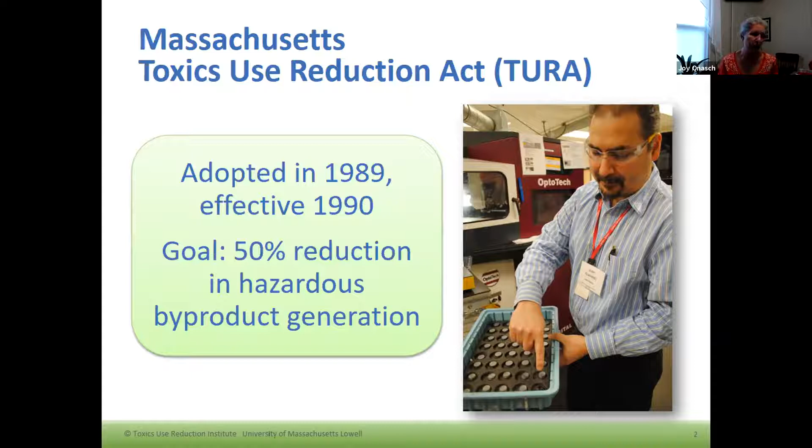We have some significant goals that have already been met with regards to helping industry reduce the use of toxic chemicals, but we continue to strive to help reduce the use of toxic chemicals in any way that we can. We like to help Massachusetts companies and communities reduce the use of toxic chemicals while also maintaining a competitive advantage. So with every project, every way that we assist people, we always make sure that it's going to help them economically as well. We don't want to push them towards an alternative that is neither going to work for them nor work for them financially. So those are very important aspects of any analysis and any projects we do with industry.

So part of the Toxics Use Reduction Act and the program is that companies must report on the amount of toxic chemicals that they use. They need to conduct toxic use reduction planning, and every 2 years assess what options are out there in good faith. And they also need to pay an annual fee, and that in turn is what supports our program to provide assistance to industry, small businesses, as well as communities.

So the core principles of toxic use reduction, I won't go through all of them, but really the whole principle is to reduce the use of toxic chemicals at the source. And that way we don't need to worry about the exposure issues, the waste generation issues, and all those other elements that come along with using the toxic chemical if we simply are able to avoid it in the first place. And there are 6 TUR techniques that we focus on.

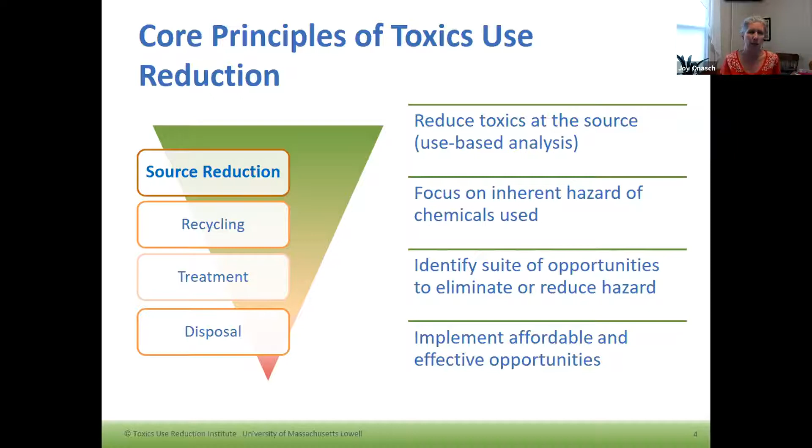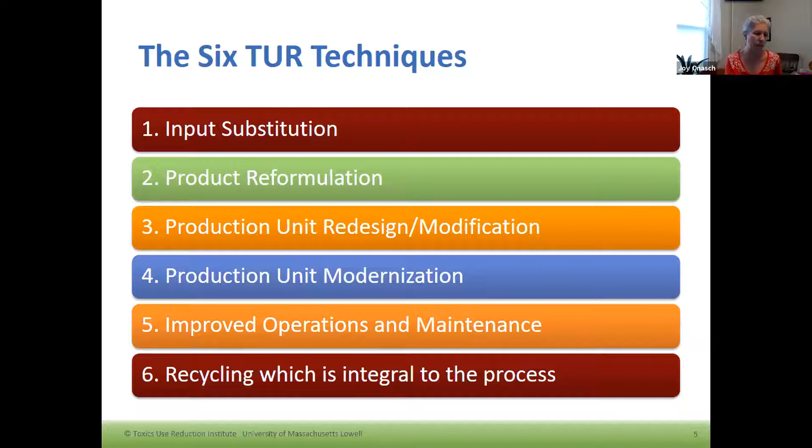Pam, who you just met, teaches the Toxic Use Reduction course, which allows people to become certified toxic use reduction planners and to learn about the 6 TUR techniques that we're focused on. And so all of our projects need to focus in on using one of these different techniques at a facility to reduce the use of toxic chemicals. We don't want to shift the hazards or the risks or the exposure somewhere else. We want to actually eliminate the issues. There are 3 different TURA entities that work on the Toxic Use Reduction Program.

MassDEP does the regulatory side of the program with regards to certifying planners, helping people with filings, taking in the filings, enforcement, and data analysis.

Then the Massachusetts Office of Technical Assistance does on-site visits when possible. Otherwise, they start doing virtual confidential technical assistance visits and reports. And then us at TURI, who focuses more on training, grants, research, preparing alternatives assessments, policy analysis, technical support, and we also have a cleaning laboratory and a library as well.

This project we're presenting on today fell underneath our industry grant program. We're very pleased that River Street Metal Finishing applied for an industry grant last year. Those eligible to apply for these grants are manufacturers in Massachusetts who have their main facility here, and are part of our TURA regulated sectors. Those sectors need to do the reporting, filing, and fee paying I mentioned earlier, and metal finishing is one of those. This particular facility doesn't because they fall under the criteria for the number of employees at their facility.

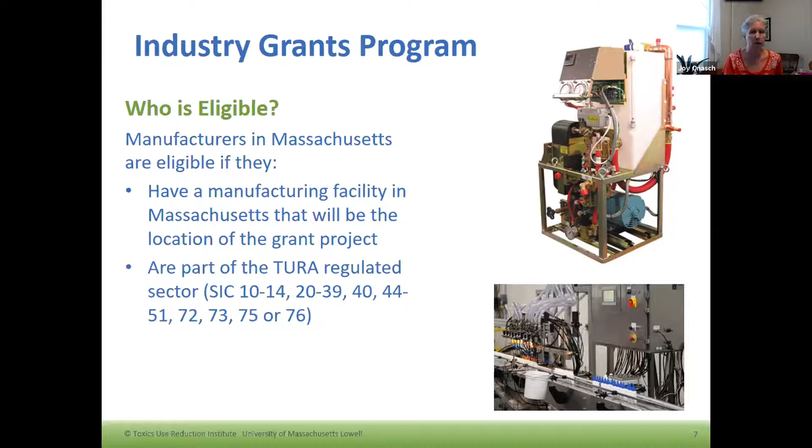Just to give you a flavor of other projects we've been working on with current industry grants this year: we've had a facility replacing an NPB vapor degreaser. NPB is considered a higher hazard substance under the Toxic Use Reduction Program and is a priority for us to work on eliminating. Another facility has replaced TCE with a safer solvent alternative and a drying piece of equipment to help finish their products.

Riverdale Mills, our first virtual demonstration event, has been reducing several chemicals by reducing drag out in their process of creating wire mesh. MSI Transducers have reduced lead through a new waffle plate design for their process. And River Street, you'll hear about more today, reducing their use of sulfuric acid. Plenus Group, who makes soup in Lowell, has done on-site testing of alternatives to sodium hydroxide used for cleaning their kettles.

So there's a wide variety of types of facilities we work with, types of chemicals we're addressing, and different solutions we're helping them work towards.

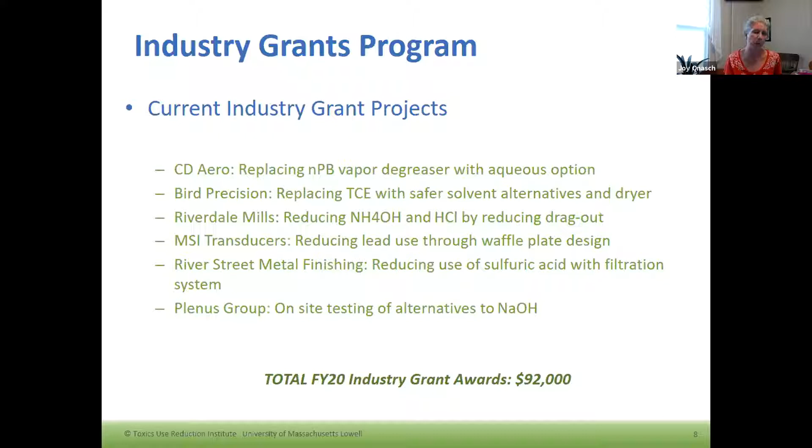Pamela Reeves, with her husband Brian, began River Street Metal Finishing in 1991. She handles all financial duties and implementation of the quality management system at the facility. Lee Reeves has been employed at River Street Metal Finishing since 2007. In addition to production work, he performs many duties behind the scenes, including customer quotes, IT maintenance, and also serves as the in-house chemist performing tank titration. So with that, I will turn it over to you folks.

Hello everybody, and welcome to our presentation. Thanks to a grant from TURI, we've been able to purchase and install an acid purification system that's greatly reduced our use of sulfuric acid. This presentation is designed to give an overview of what we do here and to walk you through how the installation of the purification system has benefited us.

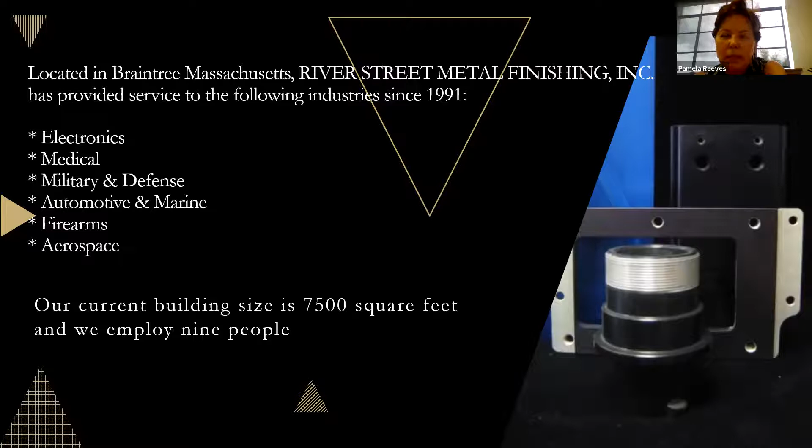We are a metal finishing company located in Braintree, Mass. We've been in business since 1991, and we service many industries, most located in the New England area. We currently employ 9 people. Our building size is approximately 7,500 square feet, and we are in the process of planning an addition that will allow us to add an additional process line and give us some much needed production space and additional shipping and receiving space.

In 2012, we became NADCAP accredited, which allows us to perform work for the aerospace and defense industry. NADCAP is an advanced quality management system that monitors and documents all aspects of our business that affect quality in any way. During the last 2 audits, we've achieved merit status. Our NADCAP accreditation took us years of preparation, and we truly consider it our greatest achievement.

Anodizing is our most popular finish that we deal with here. Anodizing is accomplished by immersing aluminum into sulfuric acid and passing an electric current through it.

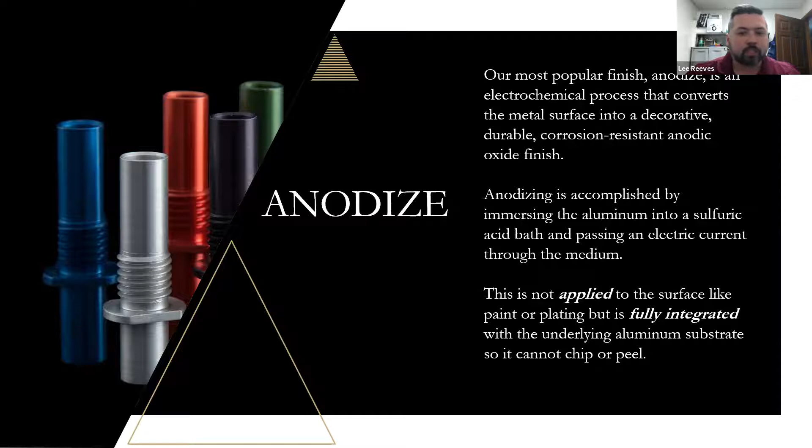So the coating becomes part of the part instead of like a surface coating, like a paint.

Our facility isn't a big facility, but you start with a simple racking of parts like this once they come into the shop.

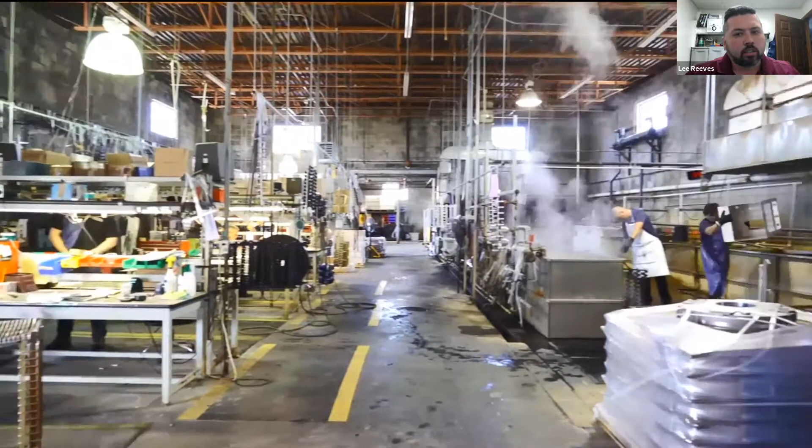Then there are pre-clean tanks, which would be everything on the right here with the hood—soap, etch, everything you need to get the part ready for anodize.

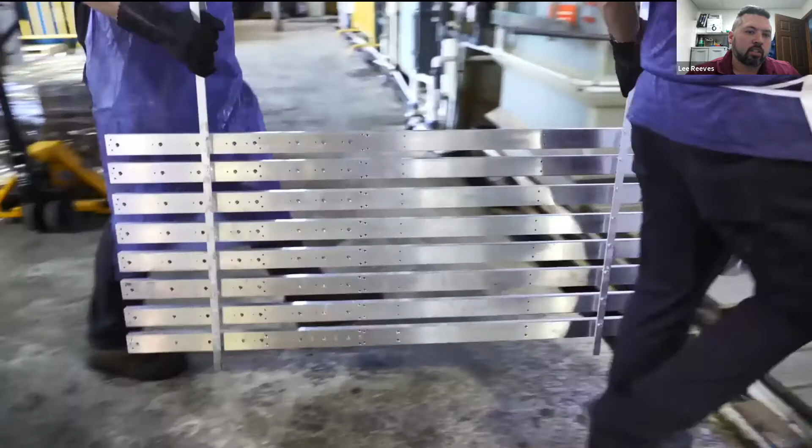Then you move into the actual anodized tanks themselves. This is a type 3 tank, which is a hard coat anodized.

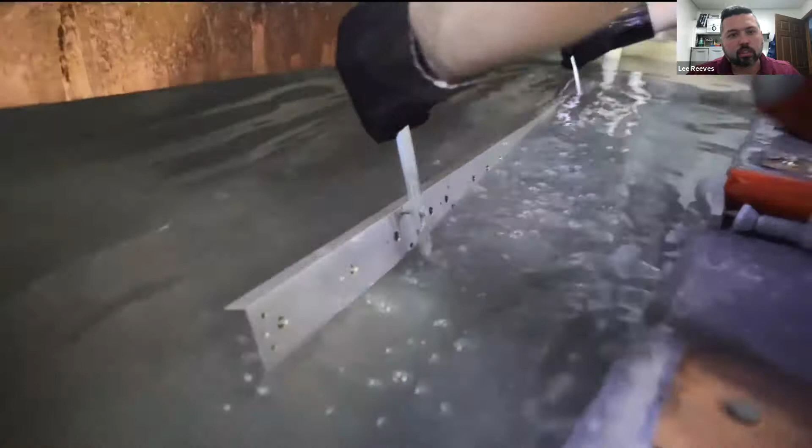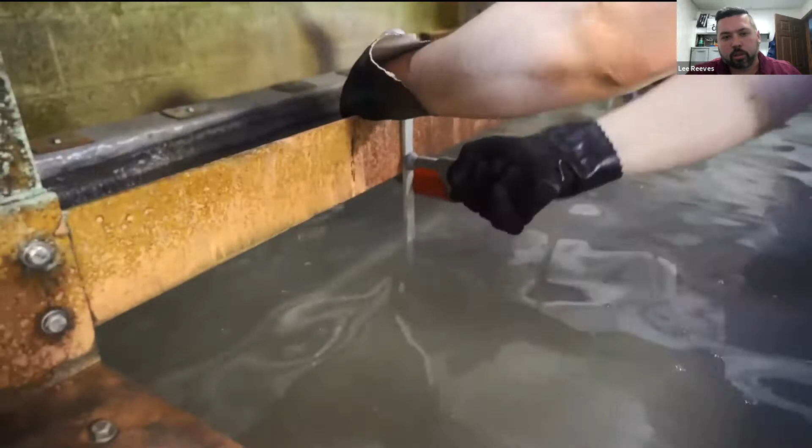Tell us what they're doing. So this is just the way that it's immersed in the sulfuric acid bath and set up to process.

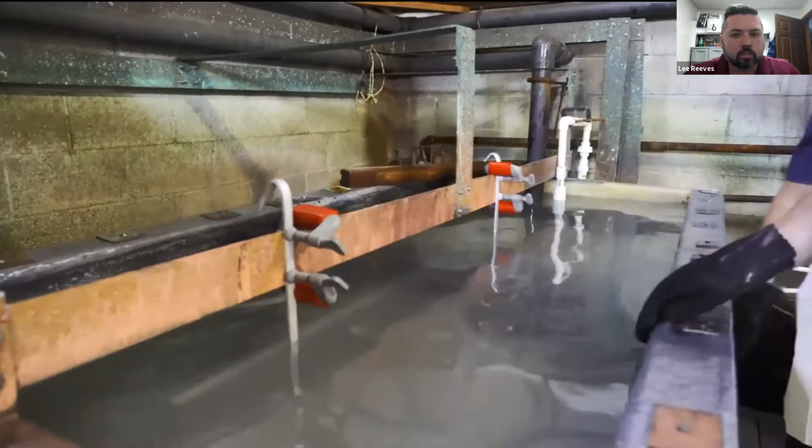And what are they doing there, Lee? So that bar is a copper bus bar, and that is the current that is passed through the part in order to achieve the finish.

Then down here are the post-processing tanks. This would be like your dye tanks and your seal tanks. The seal is the final tank that basically closes the pores of the part, so it's ready to go after that.

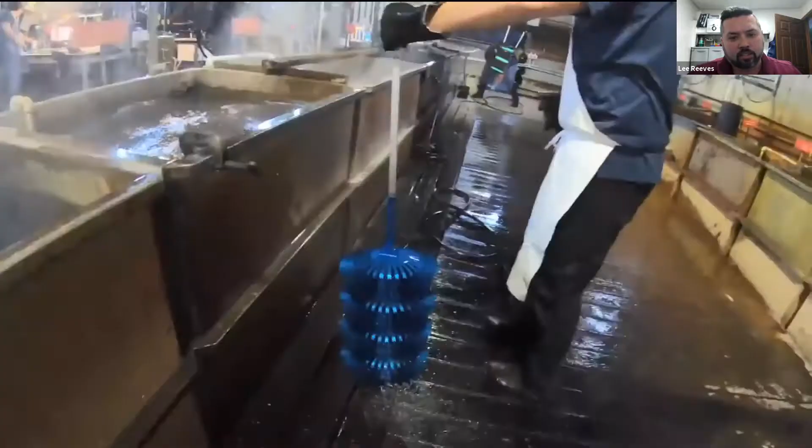So this is those same parts that you saw on the rack. This is them blue now—it hit the blue dye and hit the seal tank to finalize it, and that's our final product.

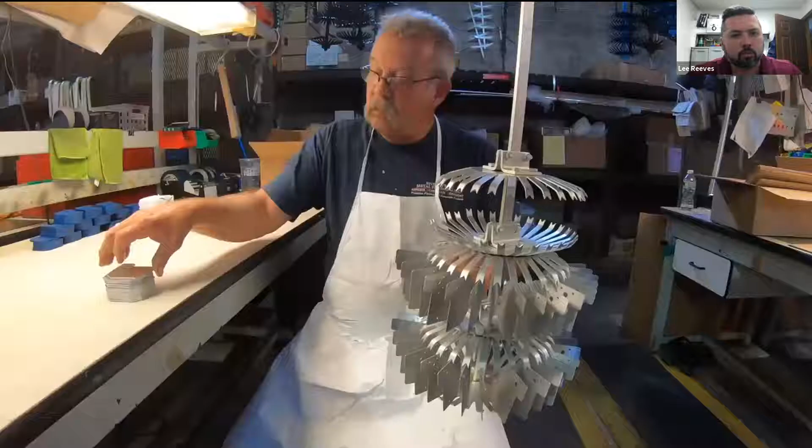To do all that, we use quite a good deal of sulfuric acid. We have 3 main anodized tanks: a type 2 anodized tank, which is 900 gallons; a type 3 anodized tank, which is 900 gallons; and we just added a second type 3 anodized tank, which is 800 gallons.

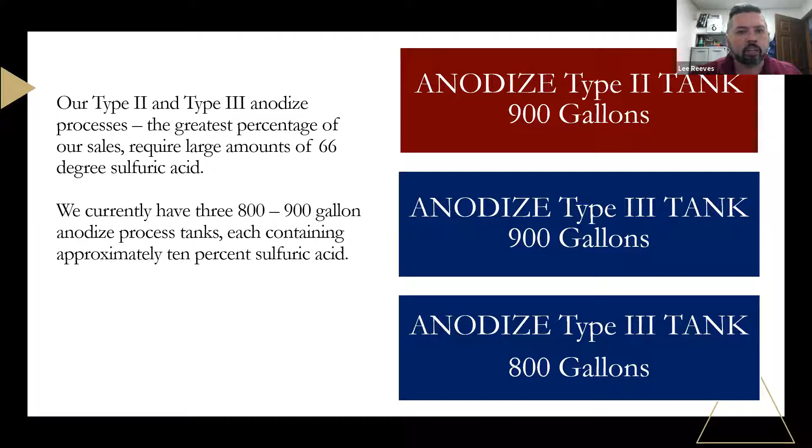To keep 3 tanks running, we use a good amount of 66 degree sulfuric acid. The tanks are monitored for concentration of sulfuric acid, but also for dissolved aluminum. We try to keep dissolved aluminum in our tanks in a range from 5 to 20 grams per liter, and it goes up faster the more parts you run through the tank.

The type 2 tank seems to climb higher than the type 3 to begin with anyway. We test for this by titrating a solution from the tank against sodium hydroxide, to find out the strength of the tank first, and then how much dissolved aluminum is actually in the tank at any time.

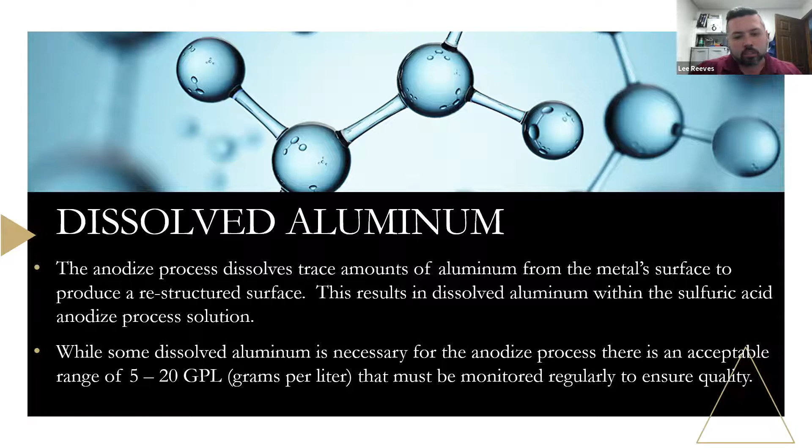Once we get to our upper limits of dissolved aluminum, in the past we would bail out 1/3 of the tank, which would be about 300 gallons. We'd pump it down, then make it up new to take the dissolved aluminum number from around 18 or 19 down to around 12 or 13.

We'd have to do that 2 or 3 times a year, depending on how busy we were and how many things were going through the tank. And each time we pumped down the tank, we'd have to use about 50 gallons per tank to make up a fresh solution and replenish what was lost.

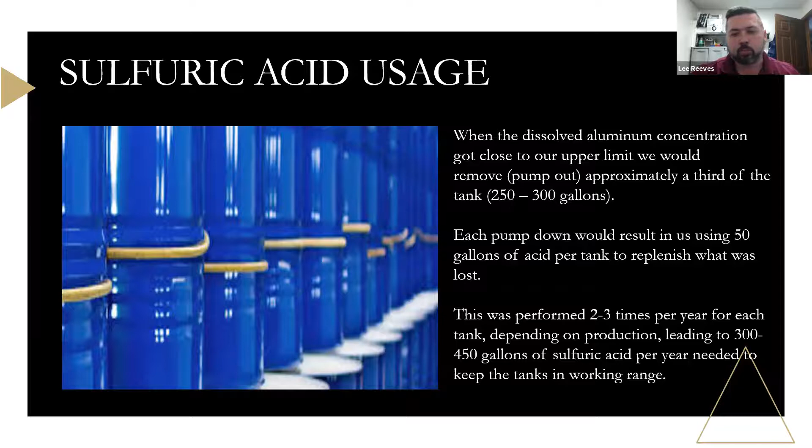For a while I'd been interested in a sulfuric acid purification system that filters the sulfuric acid, but it was never really achievable because it's an expensive system. We got in contact with TURI, and through working with them, we found out that would be the best way to reduce our usage of sulfuric acid—instead of disposing of sulfuric acid solution, we could just filter it and send it back to the tank.

We began researching systems, and we had one from a company in Canada, but while working with TURI we researched all our different options and found a local vendor, Mech-Chem, located in Mass. We met with them and went over what would work best for our system, and they gave us a quote on a system, and we moved forward from there.

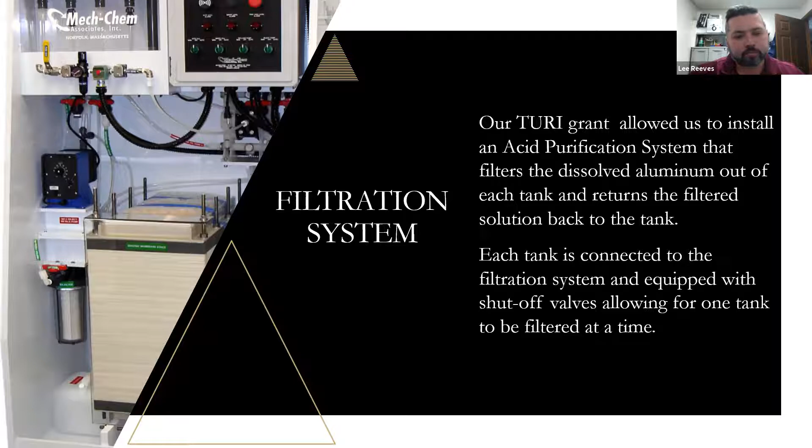This is actually a picture of the inside working of the filtration system, and it's piped in through. So we have a video.

So each tank has a to and a from, and each tank has on and off valves. As each tank gets high, we filter one at a time. So those are off right now, and if we wanted to filter that tank, we would turn that on.

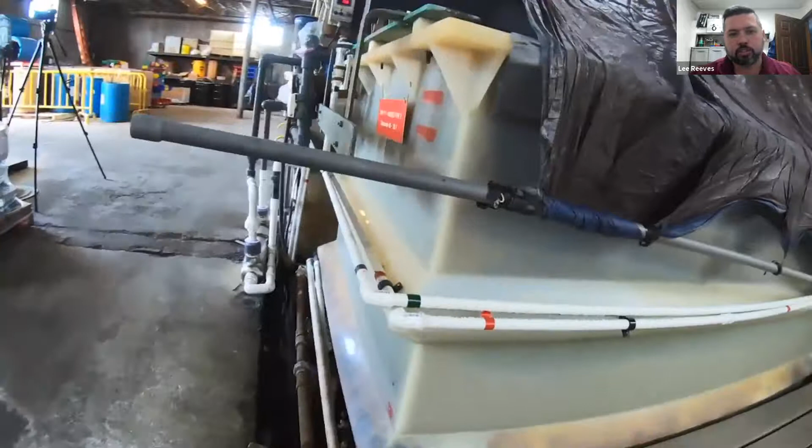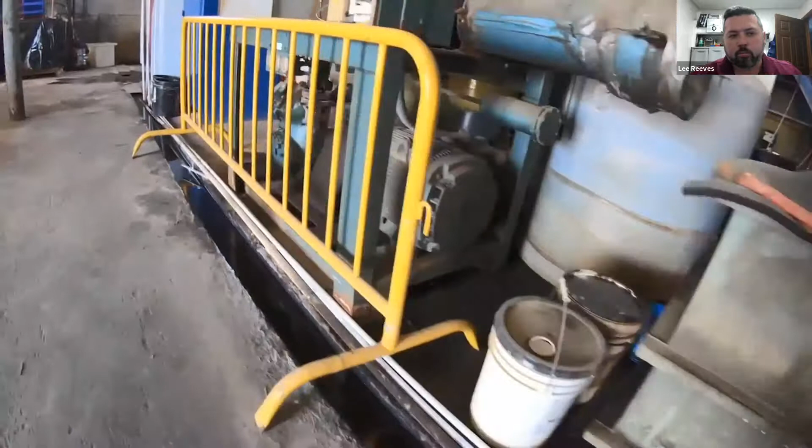There's one that's going to the filtration system, and then it hits the system. It takes a while, and then it gets sent back up through the other pipe. We keep two off at all times, and we keep one on.

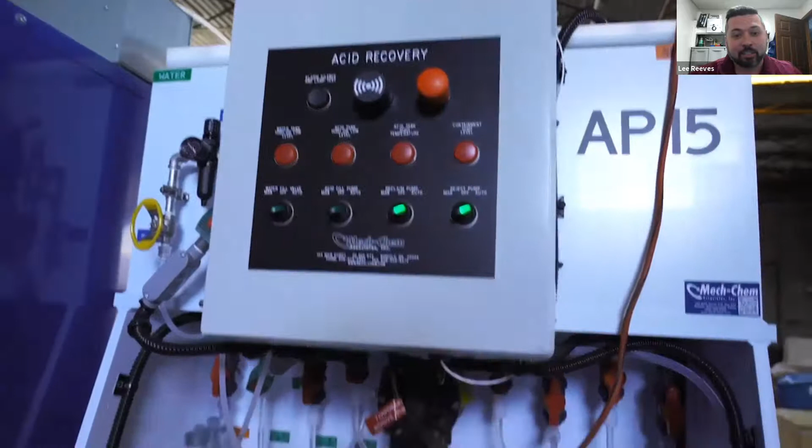So this is the system. This is me actually not doing much, just fiddling around with knobs because the videographer told me to make it look like I was using the machine. It works on its own.

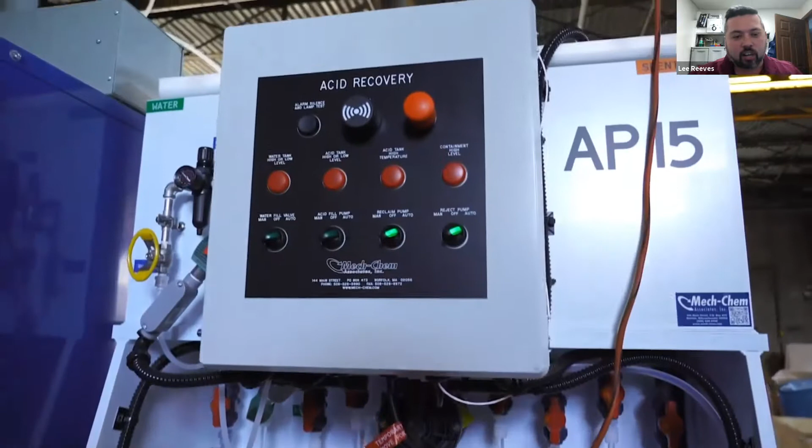Everything's automated. It will constantly filter everything down and send it back to the tank fresh and clean, and it eliminates our need to dispose of 300 gallons per tank 2 to 3 times a year, which is a great deal of sulfuric acid.

So this is just a breakdown of how we're still feeling out the machine and determining how often we're going to have to filter each tank. But this is 6 weeks of us using it on the type 2 anodized tank.

We started with 15.7 grams per liter of dissolved aluminum. Week 2 was a small reduction, down to 15.2. Over the weeks we eventually got lower, ending at 11.5 grams per liter of dissolved aluminum, which is a good spot for us, where we like to operate at all times. At that point, our type 3 tank was up at like 14.5.

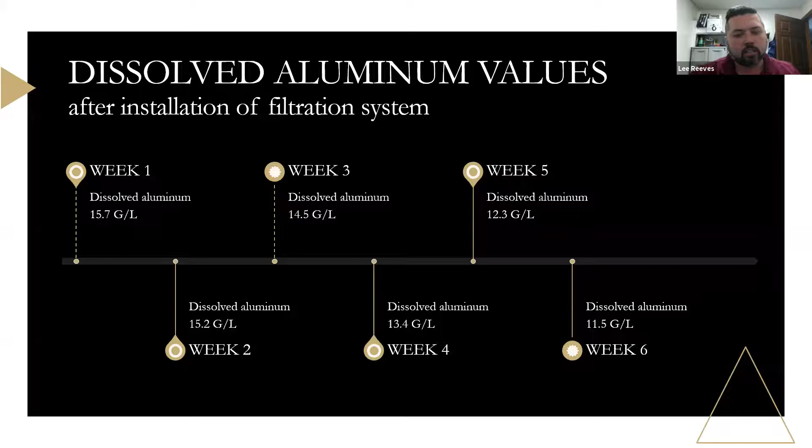So we turned off the valves for the anodized system, the type 2 anodized, and we switched it to the type 3, so that got filtered down. And we actually just changed it back to the type 2 now.

Yeah, so each tank dump before the filtration would be about 300 gallons per tank, and we'd also need 150 gallons per tank 2 to 3 times a year, which comes out to about 3 to 450 gallons per tank. We'd need about 220 gallons annually just to replenish what's naturally lost through running the tank.

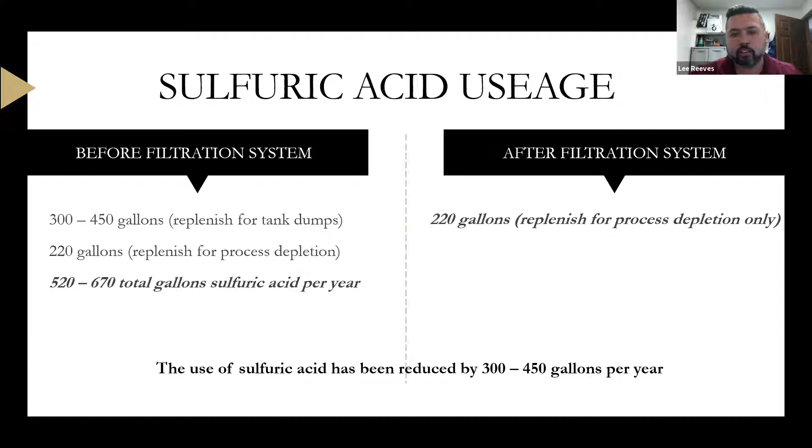So now we've eliminated the need for that 300 to 450 gallons per tank, and we're left with only needing to add around 220 gallons per year to account for the depletion that happens naturally through just using the anodized tank. So working with Terry, we've saved about 300 to 450 gallons per year of sulfuric acid.

And then I will kick this back to Pamela.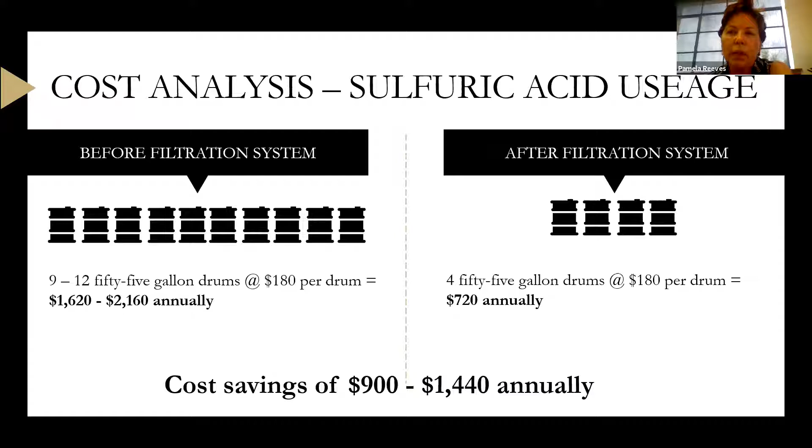So this is our cost analysis. The slide is an illustration of the cost for sulfuric acid that's purchased, or we will call it the incoming sulfuric acid. The left side, which says before filtration system, shows 9 to 12 55-gallon drums. That's about the amount we would be using yearly to replenish the process tanks after tank bales, and the amount we would also need to replenish simply due to production. This again is before the acid purification system.

So with each drum costing $180, we were spending $1,620 to $2,160 a year. On the right side, we have our expected cost savings after the filtration system, and all we'll be needing is 4 55-gallon drums, to replenish just for natural depletion due to process. At $180 a drum, we expect to be spending approximately $720 annually. So our total projected cost savings should be $900 to $1,440 annually.

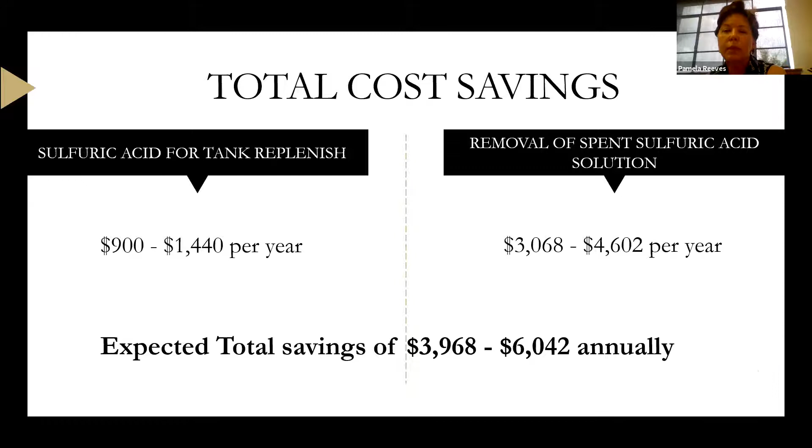Safety is another added benefit to this. Every time you do a tank pump down, you have people exposed to pumping sulfuric acid and moving it, and then when you add to the tank you're handling the straight 66 degree sulfuric acid, which is nasty stuff to deal with. It eliminates the need to put employees in the spot where they have to pump down the tank and then remake up the solution that was lost. It's better all around. Less encounters with the sulfuric acid means more safety.

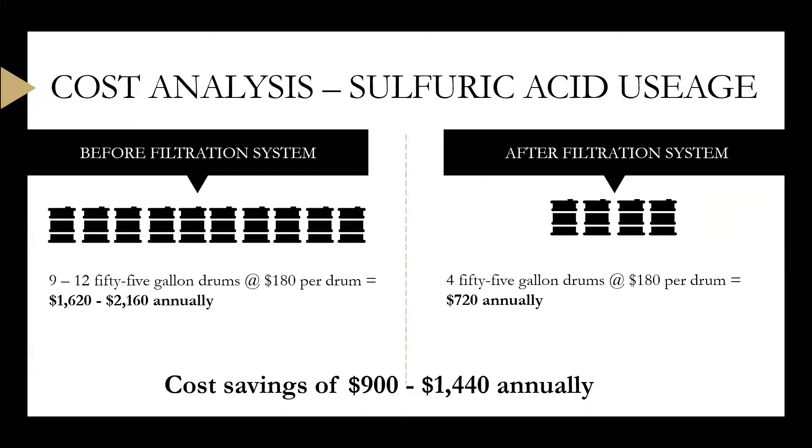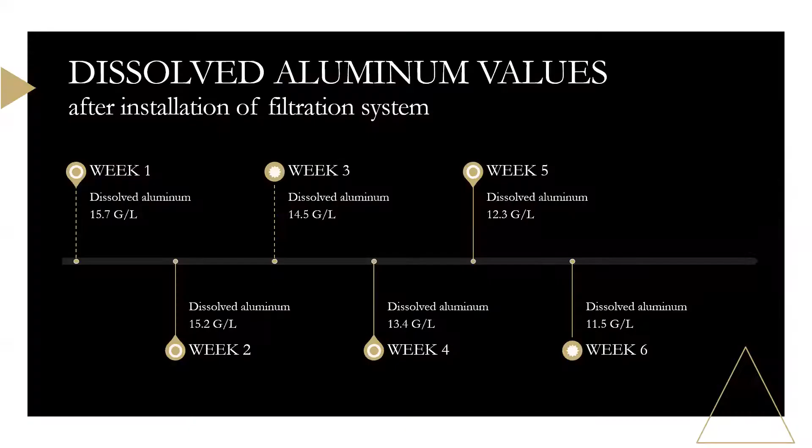Was there much of a difference between the systems from the Canadian company you referenced versus the one in Massachusetts? The one I was looking at in Canada, we didn't even get deep enough in with them to know what they were doing. We ended up finding that the Canadian one I found years ago put me on to wanting a system like this to make it easier on the shop. Once we started working with TURI, I sat down to research it again and found Mech-Chem, and just thought it was much easier to work with as a company because they're in Massachusetts and we're not going over the border or anything.

So what would happen if your system were to spring a leak overnight? Is there an automatic shut-off, and how fast is the acid being pumped through the purification system? It's not being pumped fast. If it sprung a leak, first off, it would all be contained in the setup we already have to handle the waste generated from daily production. So it would enter the treatment system, but it filters at a max of 10 gallons per day. Worst case scenario, you'd end up with 10 gallons on the floor and in the system, and it's not the end of the world. There's no automatic shut-off for it if it's from a leak, but it's very, very slow.

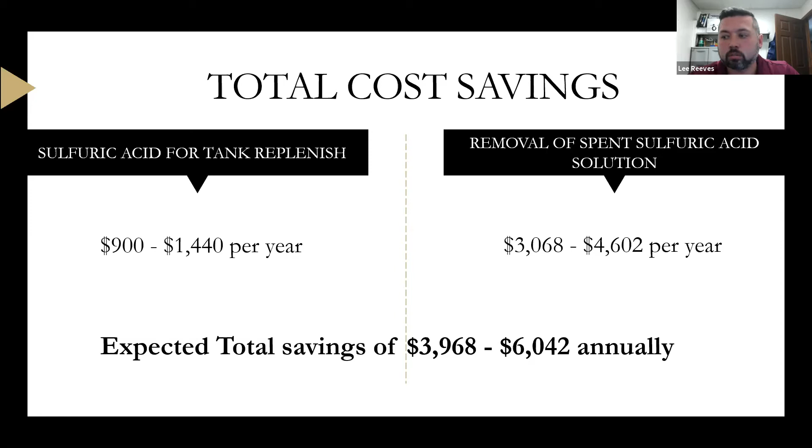Okay. I'm trying to see if I've missed anybody's questions. Lots of really good, intelligent questions in here. We have one comment from one of the people here saying that membranes may have to be changed out every 4 to 5 years, or the performance may decline. So something to keep in mind. Yeah, absolutely. Certainly, check in with your vendor on that.